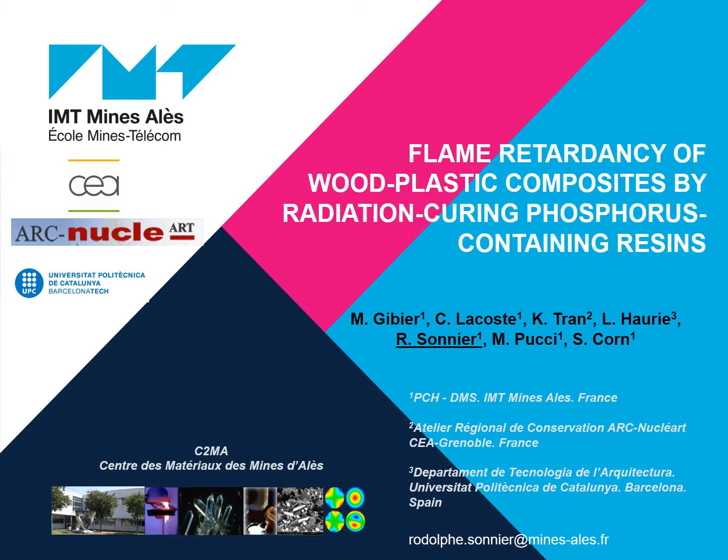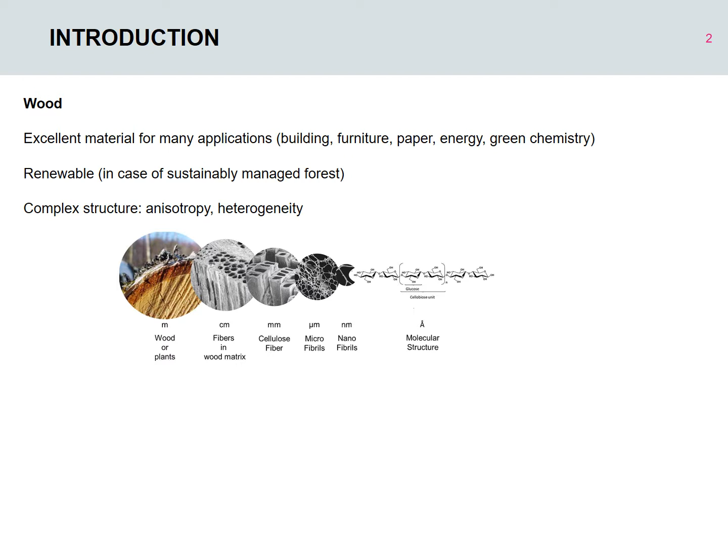Wood is a bio-based material with outstanding properties, so it is used in many applications like building, but it contains cellulose and it is flammable, so it needs to be flame retarded in some applications.

There are several chemistries available for that, based on inorganic salts, phosphorus, nitrogen, silicon, and so on. There are two main methods to improve the flame retardancy of woods: the first is surface deposition of a layer containing flame retardants, like painting, and the second is the incorporation of flame retardants into the bulk of wood.

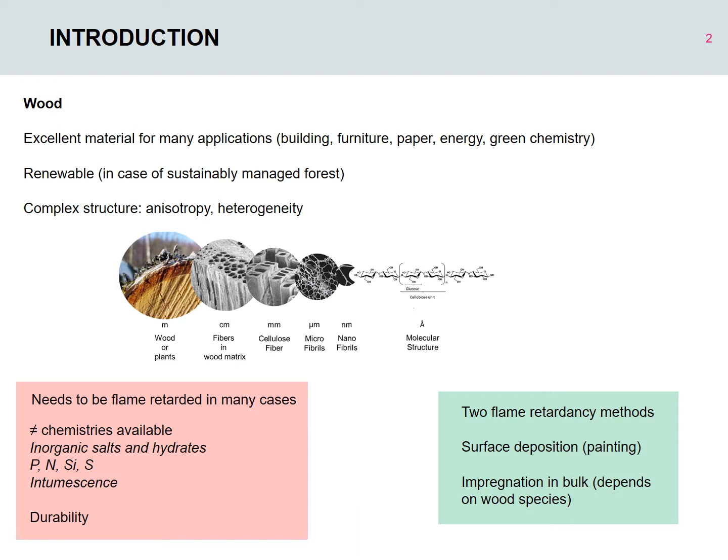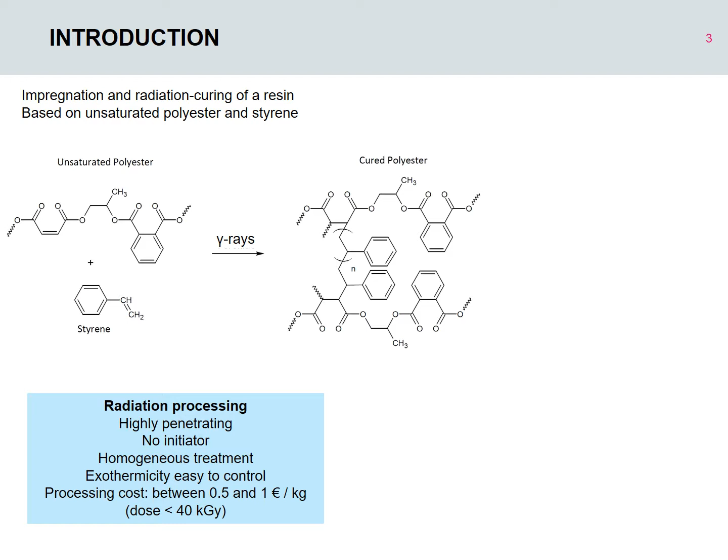Some thermosets, like unsaturated polyester, can be cured by radiation processing, like gamma rays, for example. Radiation processing is interesting because it is highly penetrating, it does not need an initiator, and the treatment is quite homogeneous. The processing cost ranges between 0.5 and 1 euro per kilogram for a moderate dose, lower than 40 kilograys. Radiation processing is already available at industrial scale for sterilization, cross-linking, grafting, but also for protecting archaeological woods.

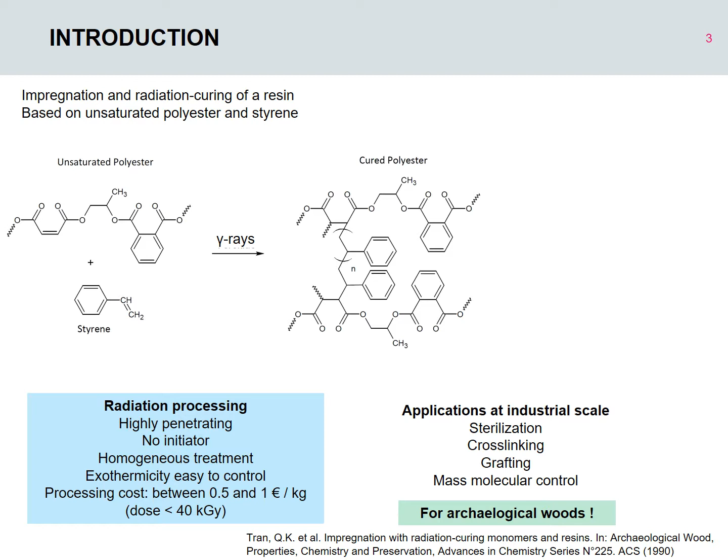And finally, if we add a monomer containing flame retardant groups into the resin, during curing, the flame retardant group will be covalently bound to the polymer, and so we can expect a durable treatment.

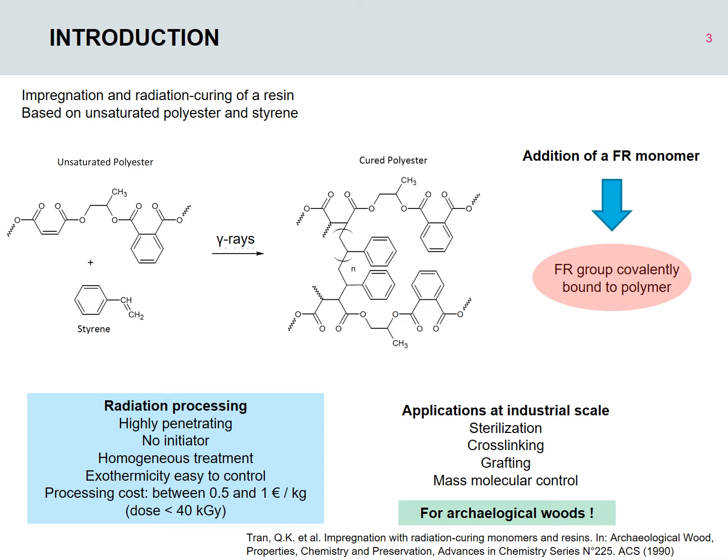For this study, we have used several woods from Mexico or from Europe. The density ranges from 500 to more than 1000 kilograms per cubic meter, and the thickness of the samples is 1 or 2 centimeters.

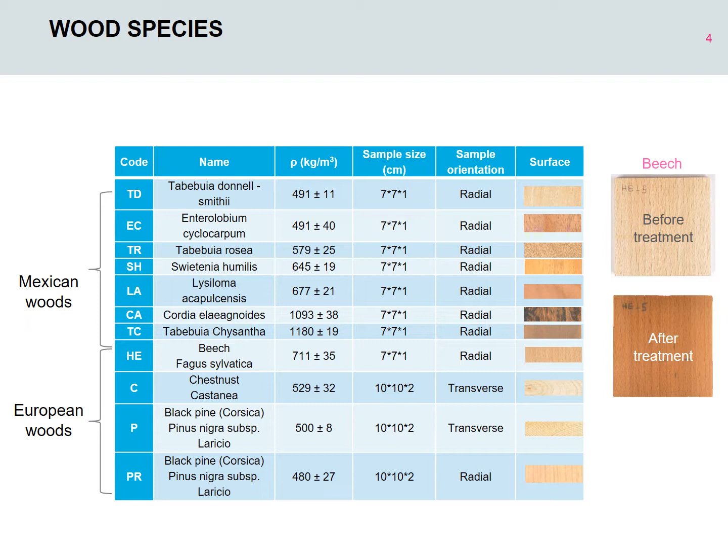The processing was carried out at ARC-Nucléart in Grenoble, France. In the first step, wood is degassed under vacuum. In the second step, the resin is added and wood is immersed into the resin. And in the third step, the pressure is increased to 6 bar during one night to ensure a good penetration of the resin.

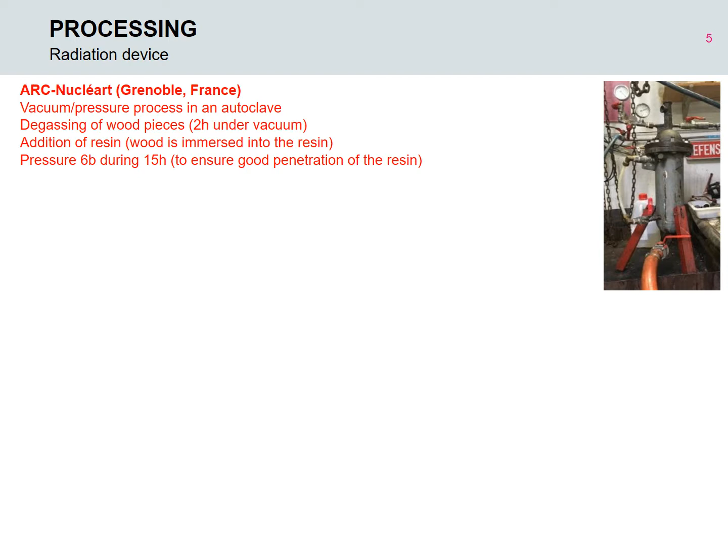We have used a typical unsaturated polyester resin, cross-linked with styrene, but we have added phosphorus monomers M1 and M2, and the content of these monomers was monitored to ensure a phosphorus content equal to 1.6% into the resin.

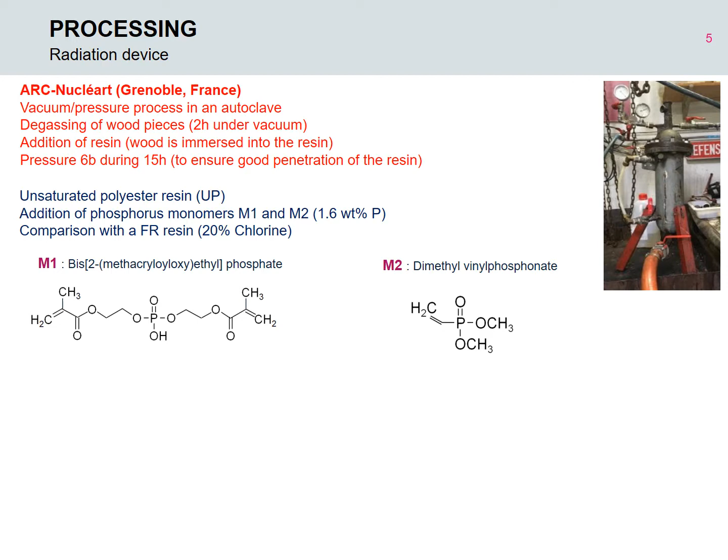We have also used a commercial flame retarded resin containing 20% chlorine for comparison.

Radiation curing was carried out using gamma rays at a dose equal to 30 to 40 kilogray, and we have checked that the curing is complete at this dose.

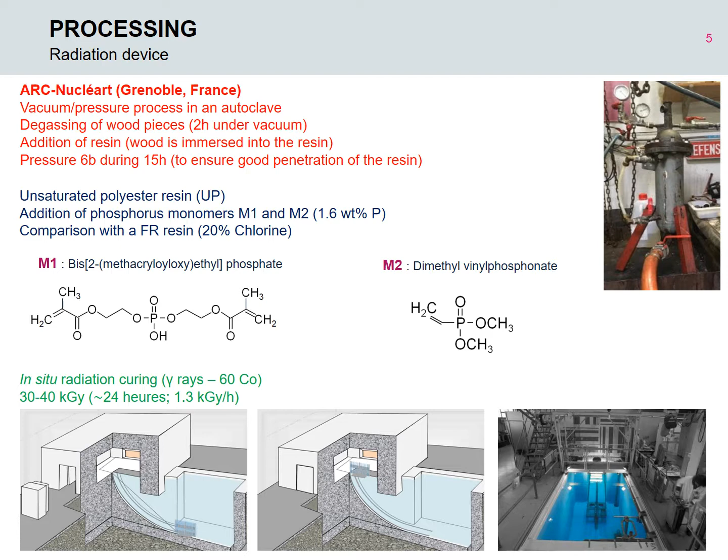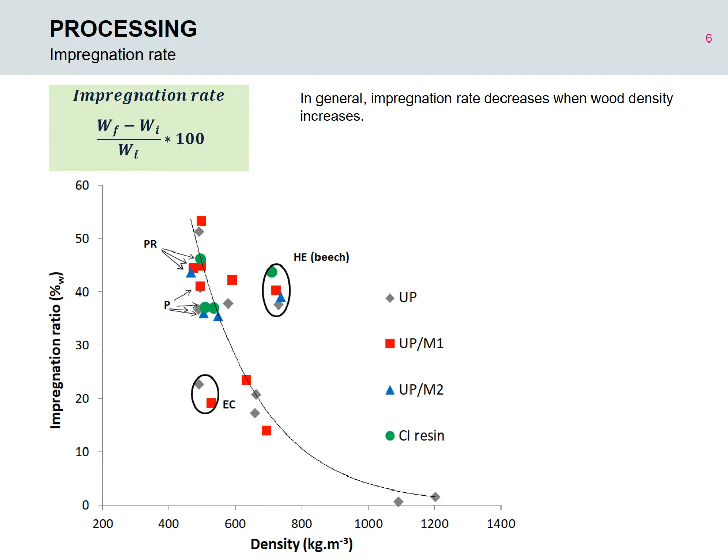We have measured the impregnation ratio of all our samples. The first observation is that the ratio decreases when wood density increases. Especially, it is very low for very high density woods, so the method is not suitable for these woods. Note that some woods like beech have a quite high density but remain very impregnable.

There is almost no effect of the resin because all the resins have a similar viscosity, so we can conclude that the impregnation ratio depends mainly on wood species. Note that the impregnation ratio reaches 50% in some cases. It's very high, and we can consider our materials like wood plastic composites. But in all cases, the phosphorus content does not exceed 1%. It is quite low.

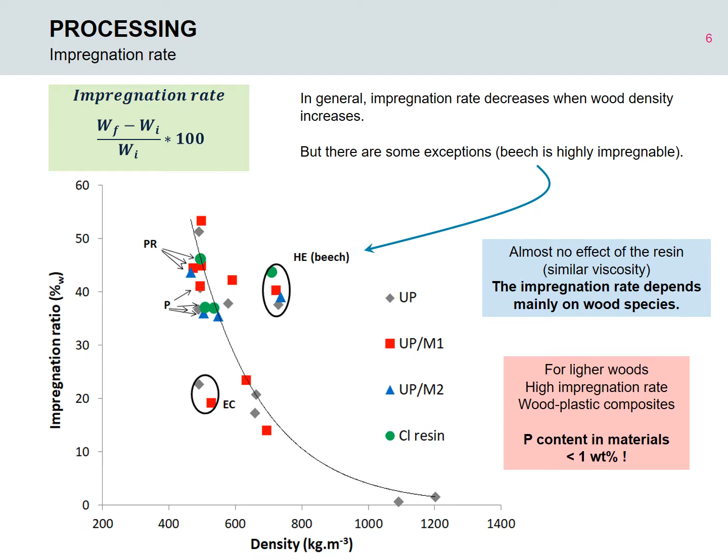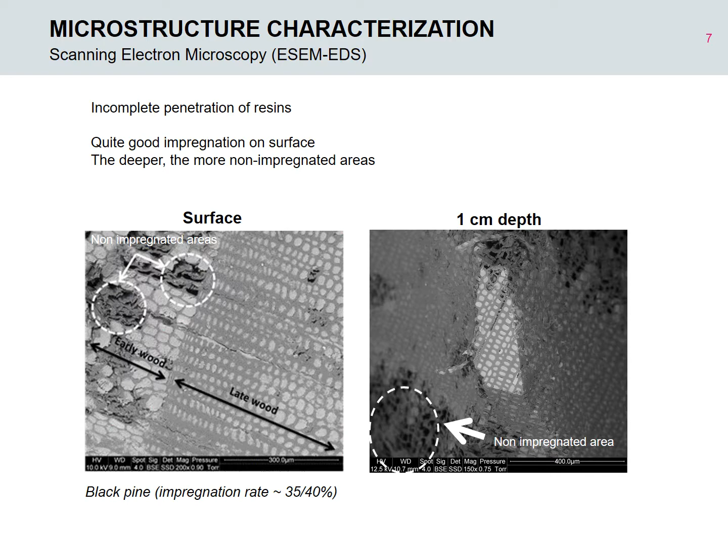We have observed the impregnation of our woods by the resin. Usually penetration on the surface is quite good, but not complete, and in depth the penetration is more and more decreased.

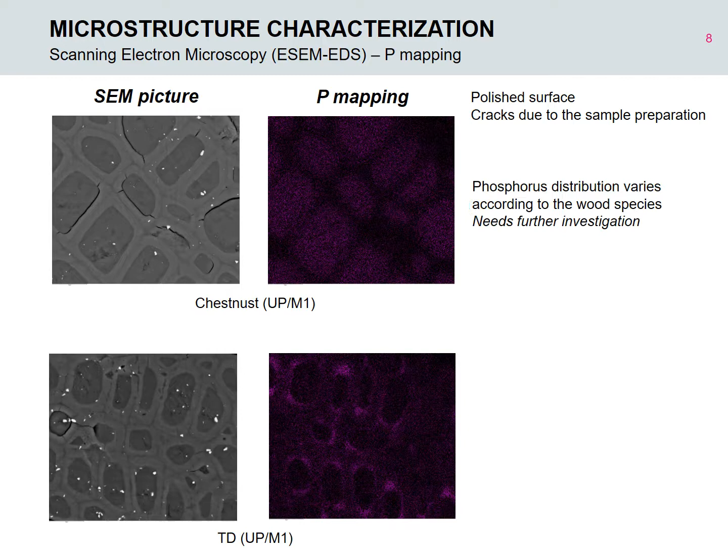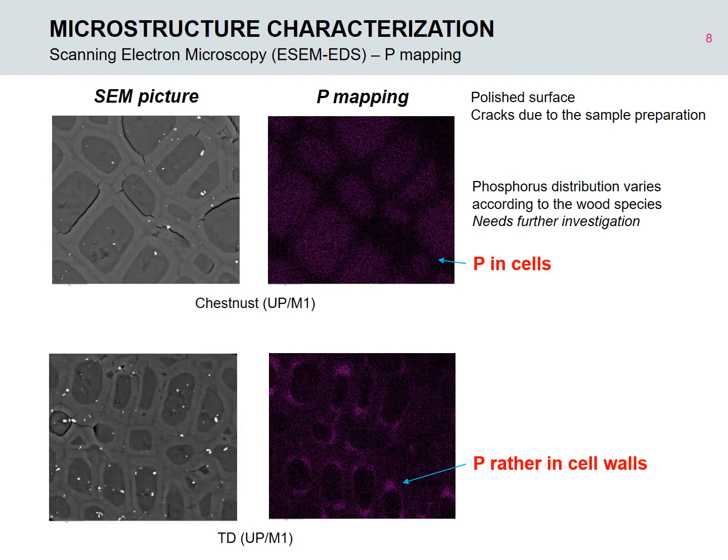We have also performed some phosphorus mapping, and we have observed some interesting and surprising results. For example, for chestnut, as expected, phosphorus is observed in cells filled with the resin, but for some other woods like TD, which is a Mexican wood, phosphorus seems to be concentrated into the cell walls, and these observations need further investigation.

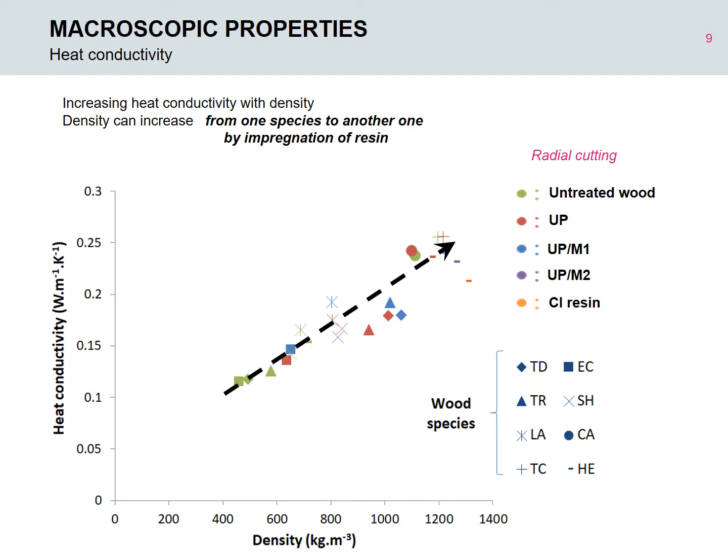This observation can be extended to other macroscopic properties like sensitivity to moisture, shrinkage, or mechanical properties. In all cases, density is the main parameter controlling these properties. We have also noted the influence of other parameters depending on the considered property, like sample orientation, wood species, or resin. For example, one of the resins containing the phosphorus monomer M1 improves the hydrophobicity.

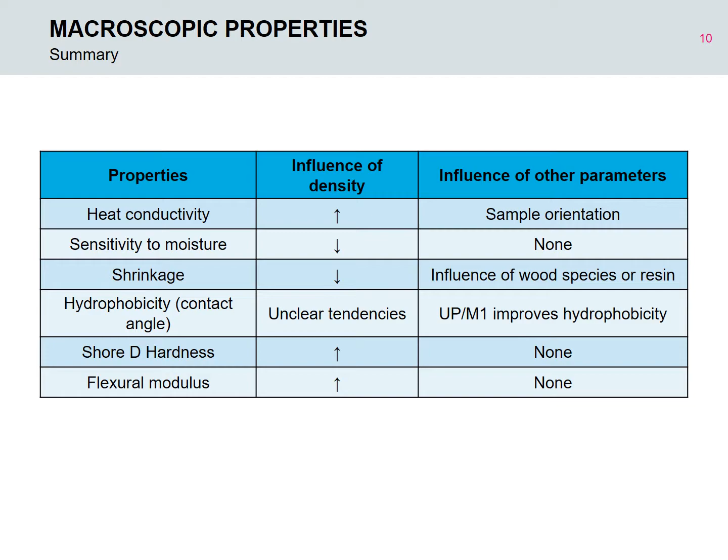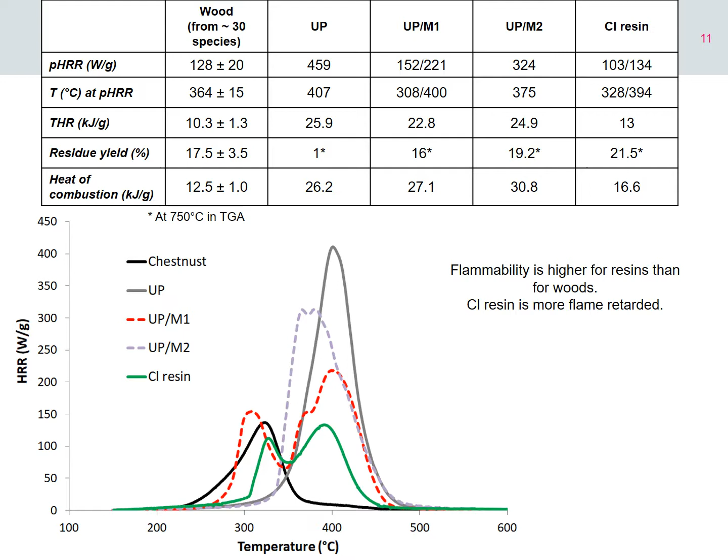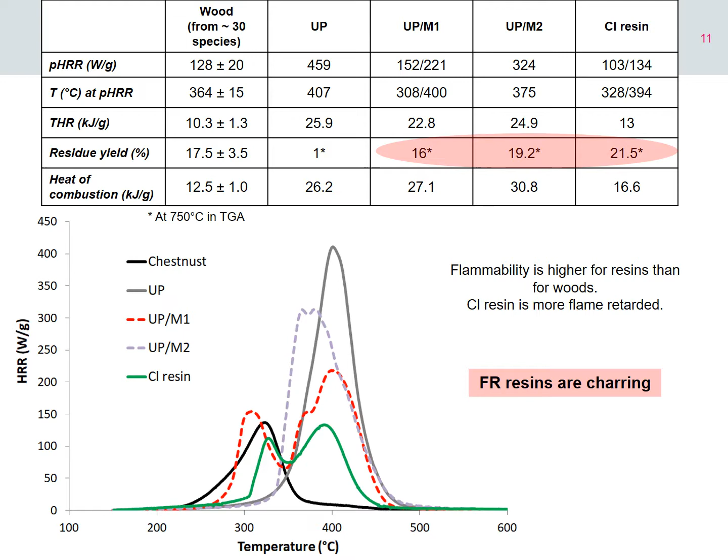From a flammability point of view, here I present some heat release rate curves at microscale using pyrolysis combustion flow calorimeter. The main drawback of our method is that our resins are more flammable than wood. This is the case of the unsaturated polyester one, but also of the flame retarded resins, including the chlorine resin, which is the best one. But at least the flame retarded resins are able to char, and the char content ranges between 16 to 21%. It means approximately the same value as wood.

At bench scale, in cone calorimeter, the typical heat release rate curve is the following one. Here it is the example of balsa, but it's the same for other woods. There is a first peak of heat release rate, followed by a plateau, a second peak of heat release rate, and finally at the end of the test, after flame out, we can observe thermo-oxidation.

The first peak of heat release rate does not change very much according to the wood species. Its value is around 150 to 200 kilowatts per square meter for heat flux at 35 kilowatts per square meter. The delay between the peaks of heat release rate depends mainly on the sample mass.

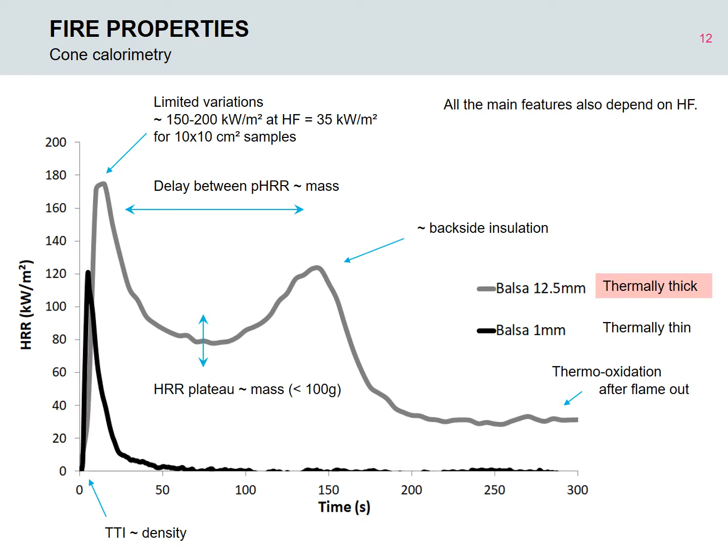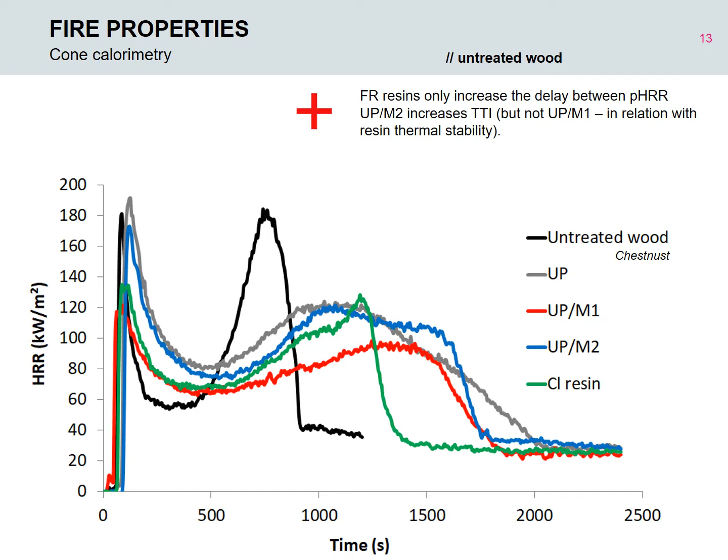In comparison to untreated wood, the resins increase the delay between peak of heat release rate because the density and so the sample mass increase. The resin containing the monomer M2 increases also the time to ignition because this resin is thermally stable. But in many cases, unfortunately, the resins increase the total heat release in megajoules per square meter, the smoke production, and quite often the peak of heat release rate.

Here I present you the best results obtained with chestnut, with the impregnation ratio between 35 to 40%. And in this case, we observe a reduction of both peaks of heat release rate. But it's not a general observation.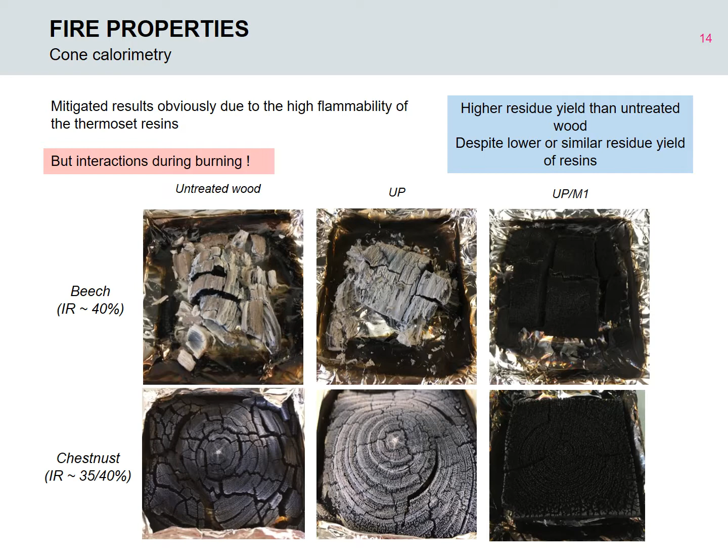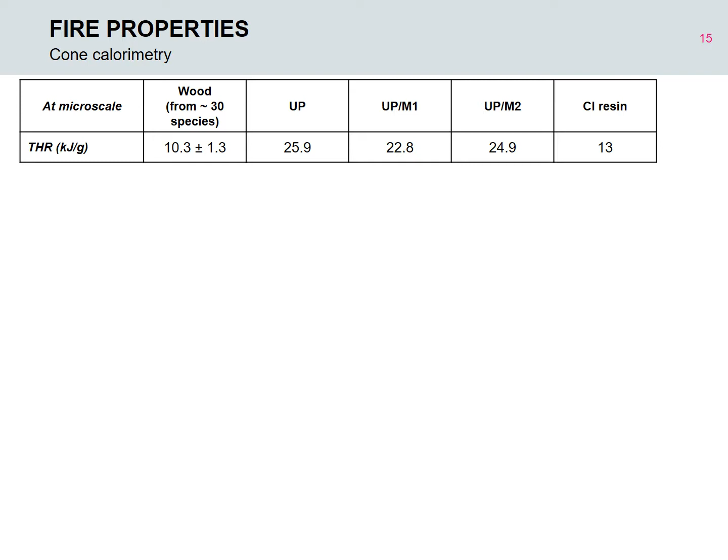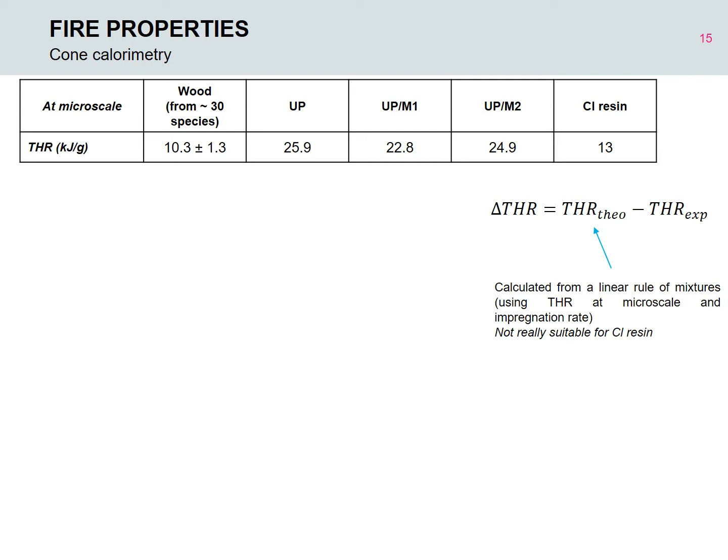The high charring content has of course consequences in terms of total heat release. Especially we have calculated the difference between the theoretical total heat release calculated from the total heat release of the resin and of wood at microscale and the experimental total heat release. Keep in mind that the theoretical total heat release for wood plastic composites should be approximately equal to 17-18 kilojoules per gram. But in fact, we have measured a significant gap between the theoretical and experimental total heat release, and this gap may be as high as 5 to 6 kilojoules per gram.

So flame retardant lowers the total heat release in kilojoules per gram, not in megajoules per square meter, of course. This is especially the case for one of the phosphorus resins, and it is in relation to the high charring content of these materials.

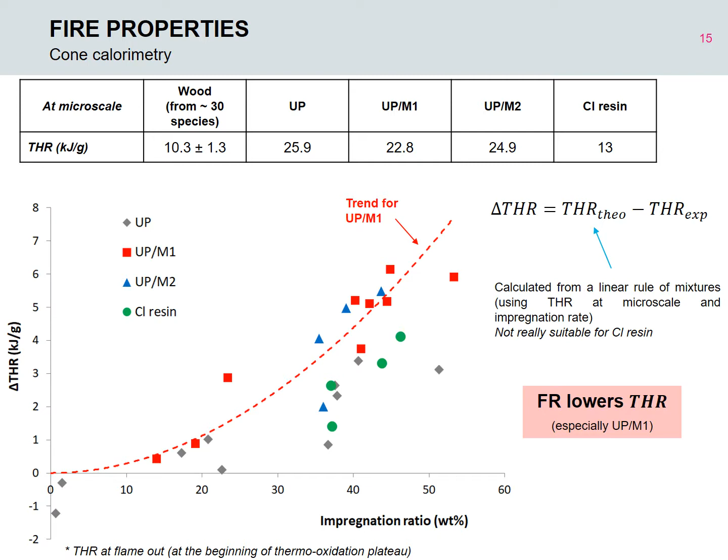This is only a preliminary result. We have shown it's possible to obtain a complete cured resin at moderate dose, lower than 40 kilogray. The impregnability is very dependent on wood species, and we have also observed a strong dependence of many macroscopic properties on the density of our composites.

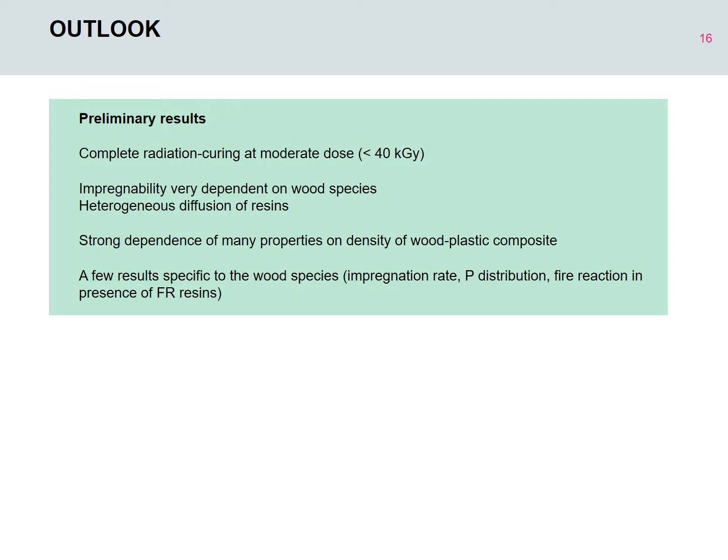Of course, at this stage, the flammability of our composites is too high. We don't pretend that we obtain very good flame retarded materials, but we think our method is promising to reach two objectives. The first one would be to monitor some macroscopic properties by incorporating a resin, and by choosing a flame retarded resin, it would be possible to monitor these properties without deteriorating the fire behavior. And the second objective would be to clearly, significantly improve the flame retardancy, but in that case, we need to use much more flame retarded resins, especially probably containing much higher phosphorus content.